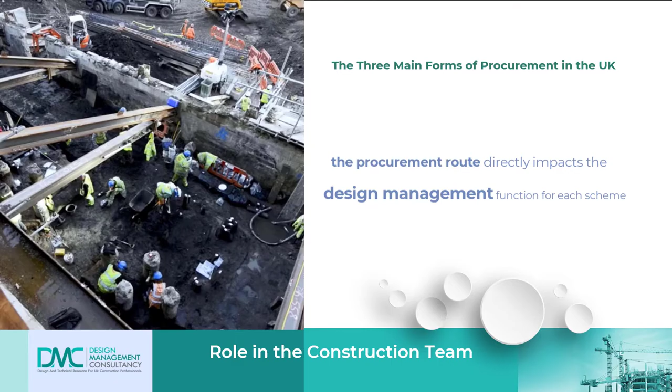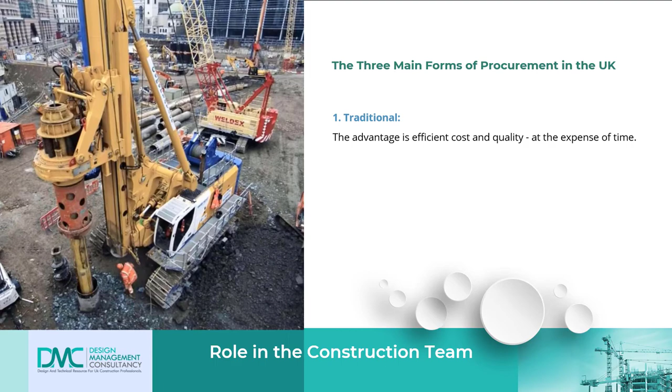The first is the traditional form of procurement. The advantage here is efficient cost and quality assurance at possibly the expense of time and perhaps also cost due to wasted time and abortive design and tendering works.

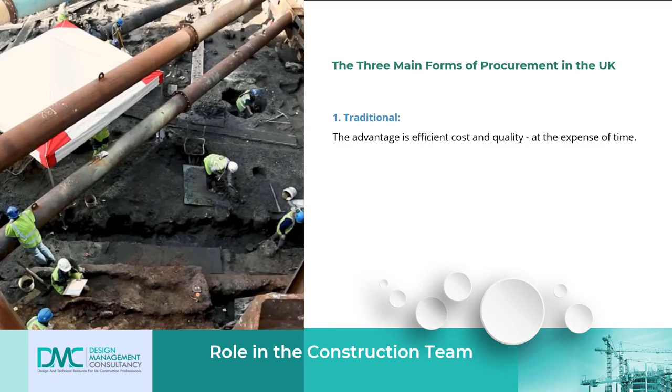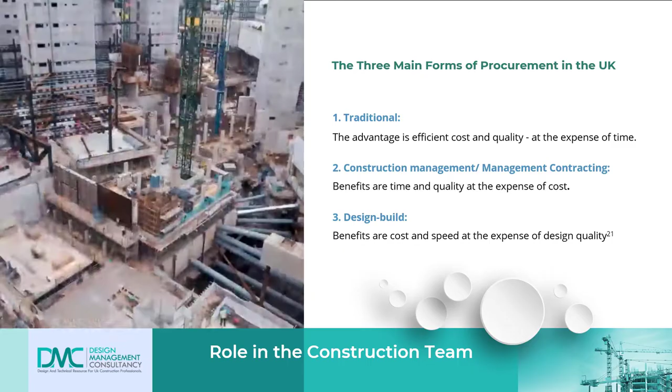The second is construction management and management contracting, which has the advantage of time and quality at perhaps the expense of wasted cost. And finally, there is the design-build procurement route, where the benefits are cost and speed at the possible expense of design quality and design control.

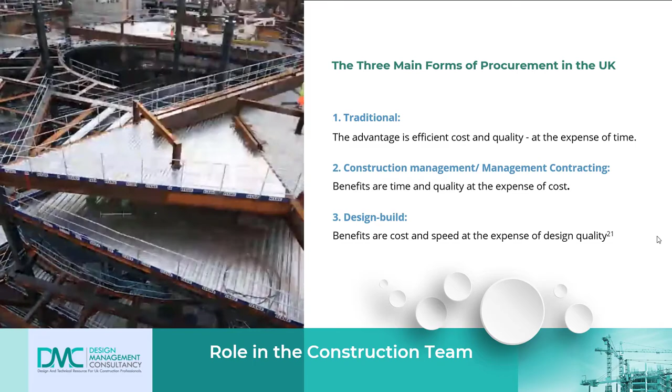Traditional procurement. With traditional construction contracts, design, pricing, and construction tasks are distinct, and activities and roles are separated one from the other. Design managers working on large, high-spec or prestigious traditional schemes might work for contractors, but they are more likely to represent the clients, design consultants, or suppliers when it comes to traditional forms of procurement.

Contractor-led procurement. There has been a surge in design-build forms of procurement in the United Kingdom because of a response to increased construction complexity and the emergence of further specialized materials and methods, and, more importantly, changes to design responsibility and risk. Contractor-led design-build contractors often employ design managers to help deliver, coordinate, and monitor the design portion of the works.

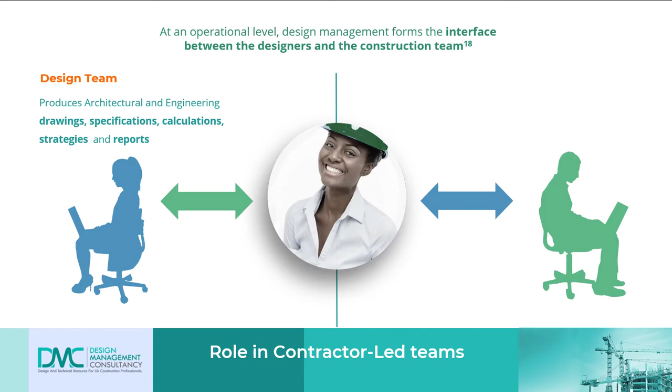At an operational level, design management forms the interface between the designers and the construction team. In terms of design production, we get drawings, specifications, calculations, strategies, and reports from the architectural and engineering consultants. And the design manager coordinates this data with the subcontract packages which are bought by the main contractor and which include specialized design fabrication drawings and technical submittals.

This diagram represents the way the design management function often links all the parties together, the construction, commercial team, with the designers as well as the investor or client.

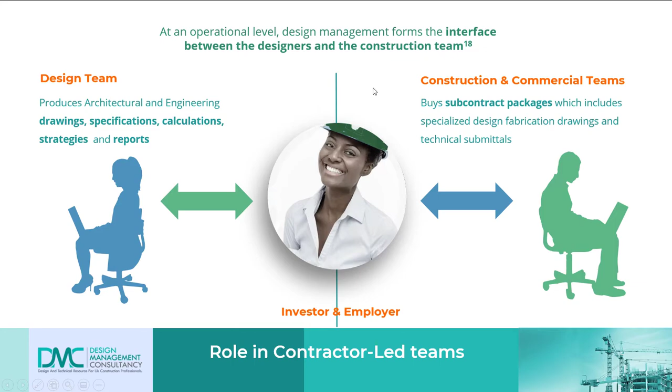This is a list of the duties that a delivery or pre-construction design manager will undertake when working on a live construction project. First, they review and distribute the technical submittals produced by the subcontractors, who in turn produce the manufacturing and fabrication drawings and specifications and calculations, which are approved by the design team and the design manager.

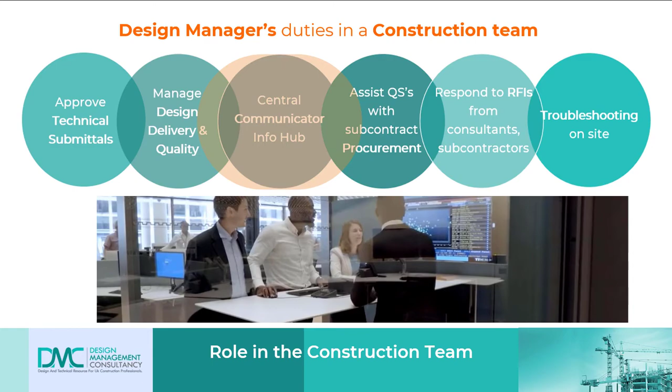Secondly, they facilitate the delivery of the design and manage the quality of any samples and mock-ups which are presented to clients and the planning authorities. We have already discussed that the design manager often becomes the central hub on a building site, liaising with everyone from the investor and the planning authority to the painter and decorator on site.

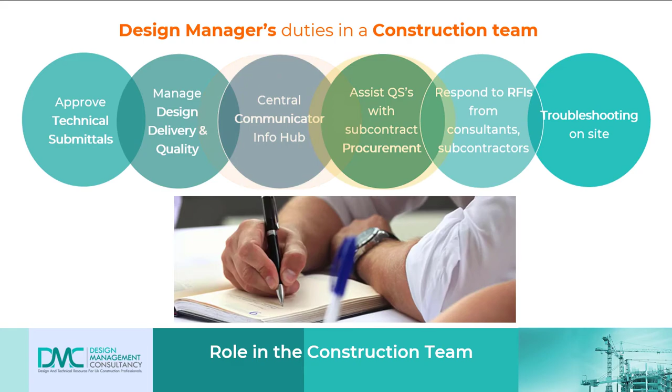They also work very closely with the commercial team and the surveyors to collate drawings and specifications for procurement of the important subcontract works. And on a daily basis, design and technical managers will respond to queries and requests for information which come in continually, and will often be asked questions about materials and methods and help resolve any clashes on site by troubleshooting with the build team.

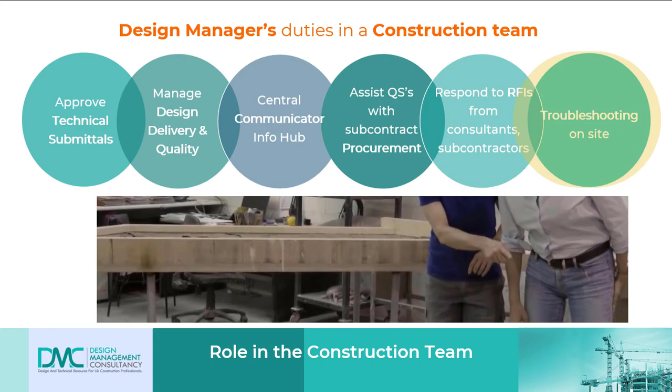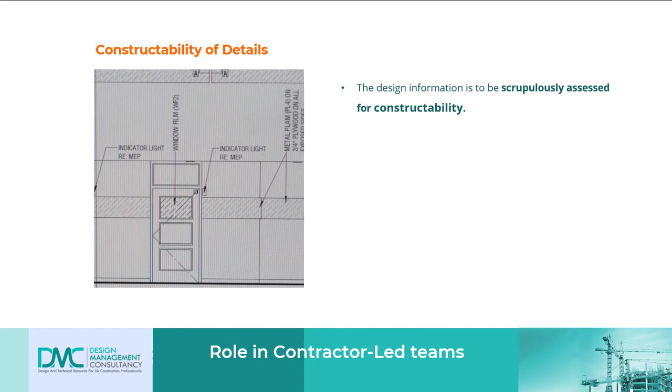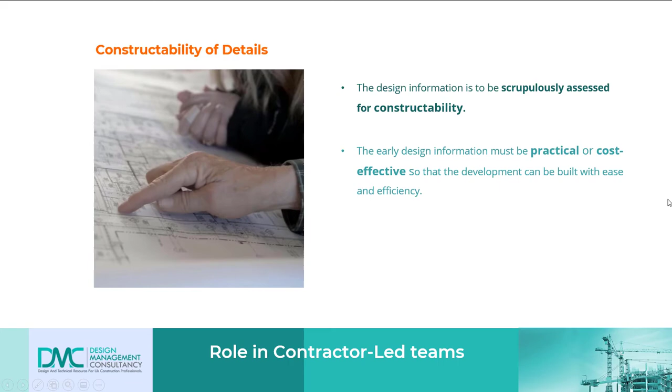Obviously, an important part of the design manager's job is to scrupulously assess the hands-on constructability of the details and building systems being proposed by the design team, particularly during the concept, schematic stage and spatial coordination stages of design development. The early design information may not be practical or cost-effective, and the operations team responsible for the build will need to ensure that the development can be built with ease and efficiency.

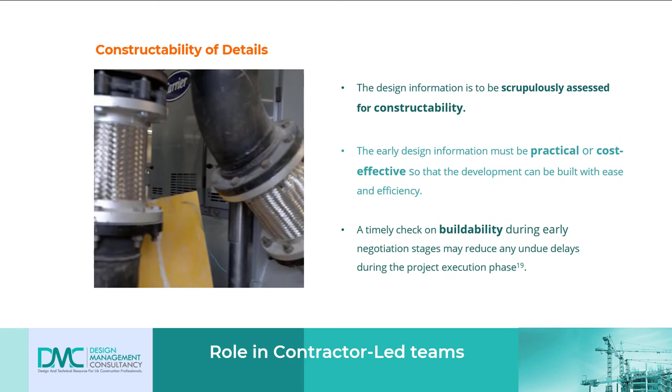A timely check on buildability during the very early negotiation and resolution stages can also reduce any undue delays to the construction program during the project execution phase.

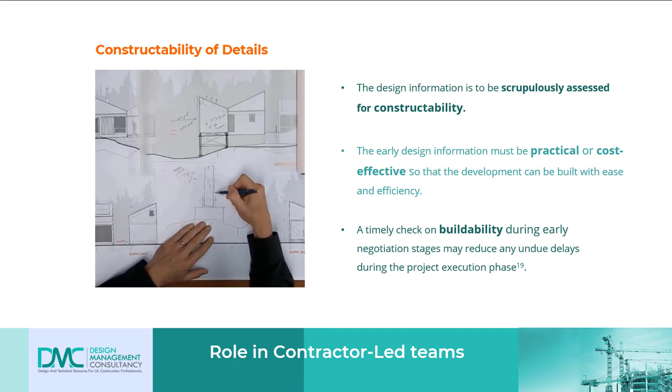Constructability of design details. Sketches such as those on the left-hand side can be produced during workshops with designers and subcontractors, often drawn up by design managers who might have an architectural or engineering background and training. And then details such as these can then be discussed with the build team and checked for viability by the commercial manager if there are any significant deviations from the agreed contract drawings, particularly on a design-build contract.

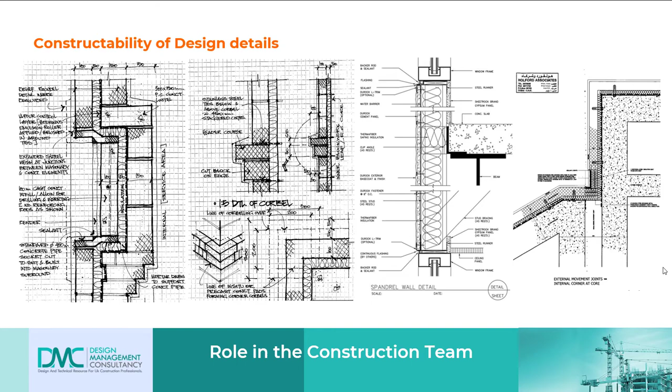Then these proposals have to be accepted by the professional design team upon their own internal review, and if they're happy with the recommendation being put forward by the D&B contractor, they will produce drawings, such as those on the far right-hand side, incorporating these sketch proposals into their master design. In this way, the development of the technical drawings is often a joint effort on design-build schemes, with the design manager toing and froing between the various contributors to the design.

This diagram by John Eynon, which represents the design manager's place within the construction team, is based on what he calls the perfect design management model. Ideally, the design management function should be given equal weight and work alongside the construction and commercial management teams, like a tripod with 3 equal legs and equal weighting.

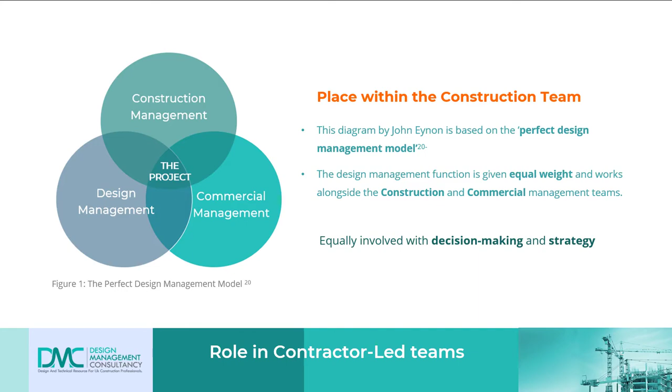Design managers should be equally involved in all stages of decision-making and when it comes to determining strategies for executing the project. However, there are still main contractor and development teams that prioritize construction and commercial functions and might possibly sideline or underutilize the design management function.

I have worked on schemes where the 3 departments are working as independent silos, where perhaps the QS might be making decisions, say, back in head office, and not communicating clearly with the production team, or, more often, as is the case, the construction and commercial managers work very closely together, meeting privately, and actually make technical decisions without including myself or other design managers.

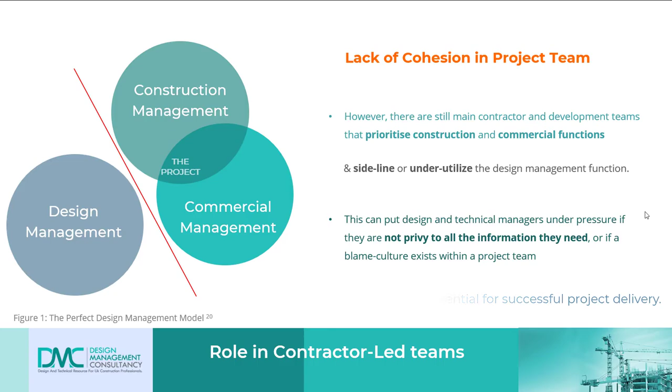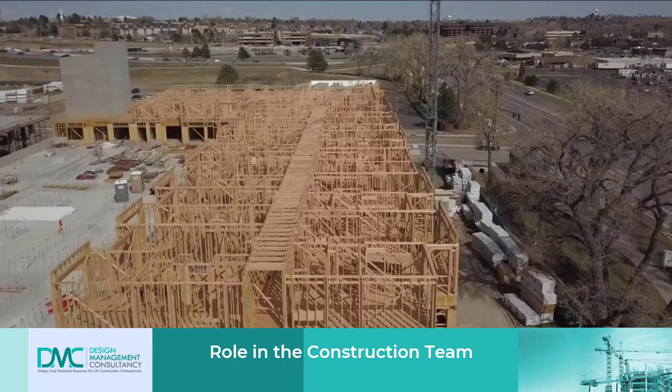To summarize, over the past 10 or 15 years, main contractors in the UK have increasingly taken on design liability, and design managers have come on board to help integrate design information and monitor quality, particularly on design-intensive or high-end design-build projects. With any design-build contract, a client often has a lot less direct interaction with the consultants, and this is where the design manager proves useful and will often fulfill a client liaison role, as well as coordinating visits by the statutory inspectors, and can bring together the design team and the specialist suppliers and specialist subcontractors.